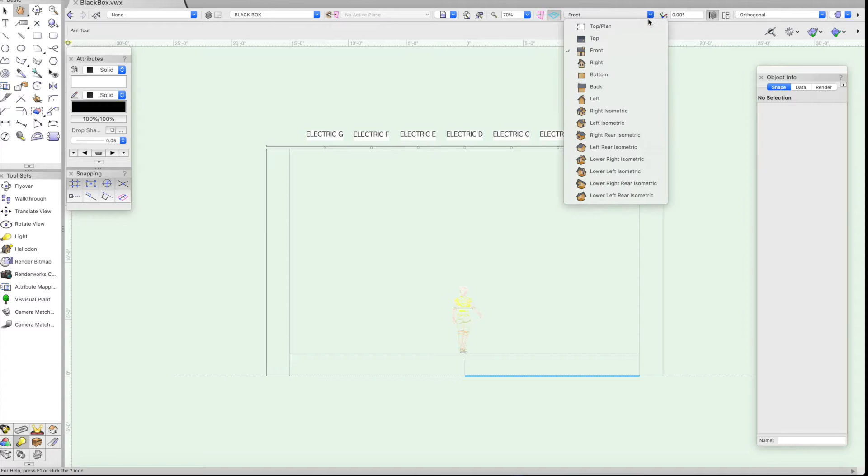This is the front view. We're going to switch to a section view so you can see what it is from the side. You can see here our audience is down front. And then I also wanted to show you, go back to the top view, we're working in Vectorworks, so I built this in 3D, which means that we can look at it using OpenGL, and you can see it more

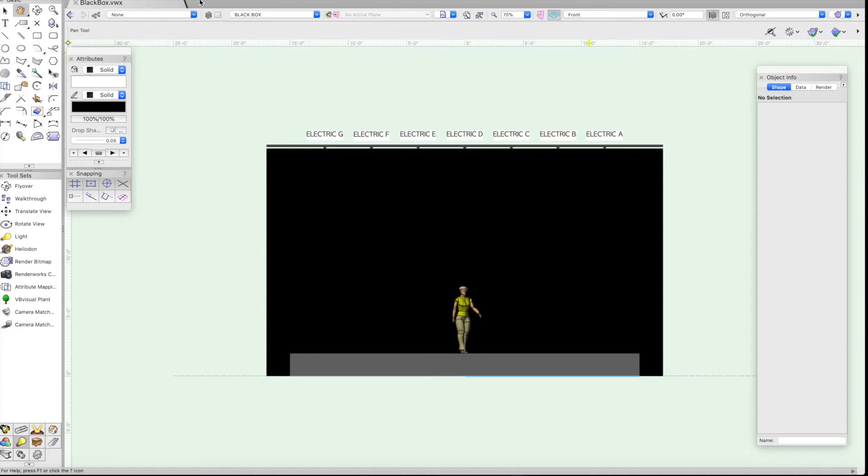as a 3D space. We will be turning the lights on, so I'm going to rotate the view here a little bit just so you can sort of get a perspective of what we're looking at. In this case, it's a proscenium style theater with the audience in front. The actor is dead center. And we're going to use this to explore the McCandless technique.

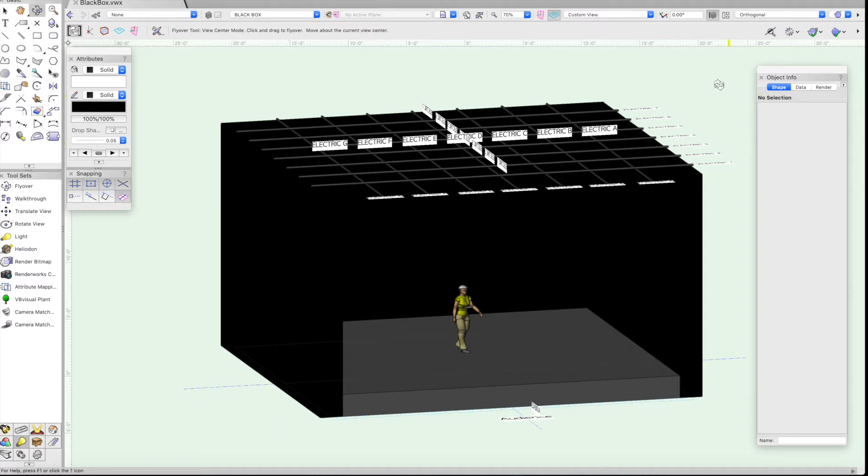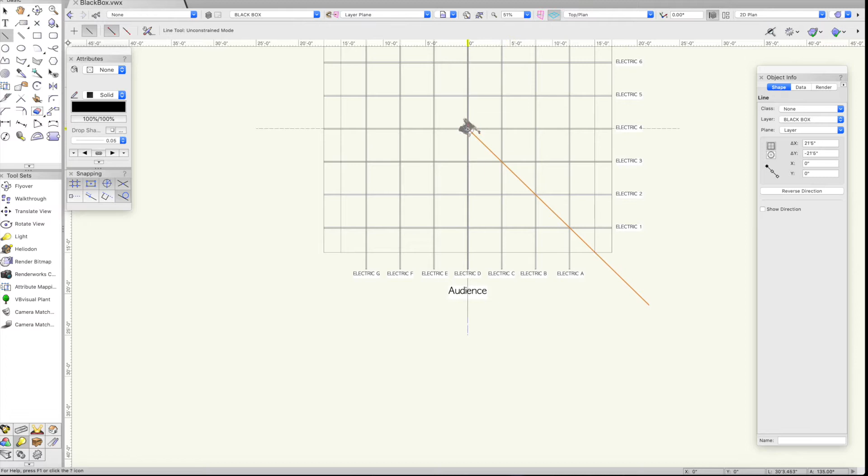So we've switched back to our top or plan view, and now I'm going to give myself some lines to work with so that I can measure 45 degrees. So if I'm looking from the actor's perspective, from straight in front of them, I'm going to go 45 degrees out to the right and 45 degrees out to the left.

And then again, because we're using Vectorworks, I have some extra tools to show you. This is in fact a 45 degree angle, and that's from the center of the actor out to the right and 45 from the center of the actor out to the left.

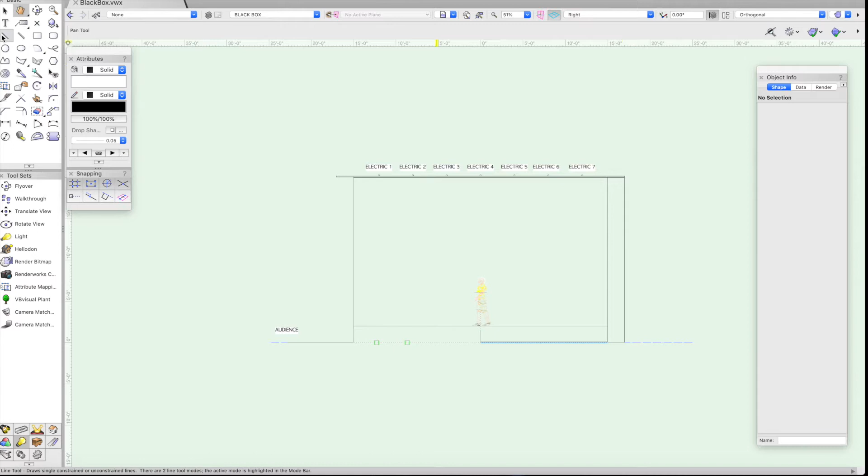Now we're going to switch to our section view, so I'm looking at this from the right side again. You can see our audience is down front, and I need to do 45 degrees up. So I'm going to draw a line straight out from the actor and then one 45 degrees up. And you'll see, I'm going to show you it's 45 degrees.

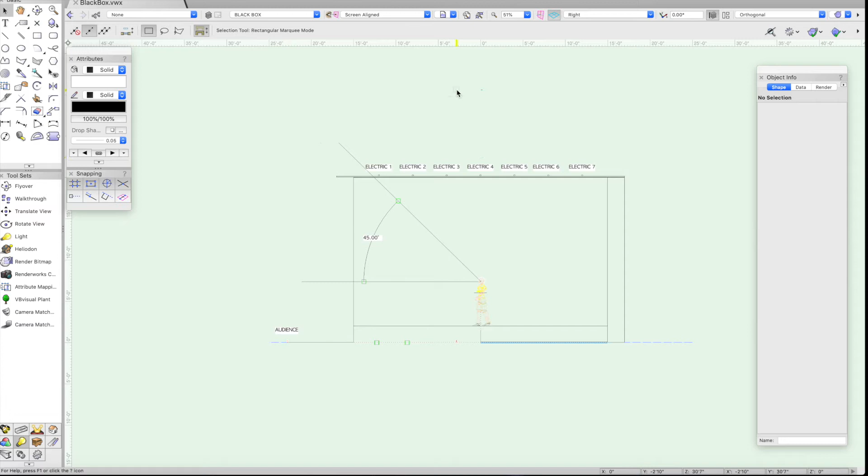And you'll notice here that electric 1 is not actually 45 degrees, but it's pretty darn close. So we know that we want to put our lights on electric 1 when we switch back to our plan view. So I'm going to grab a light here. I still have my 45s, and I know from my section view that I want to put it on electric 1, so I'm going to add a light.

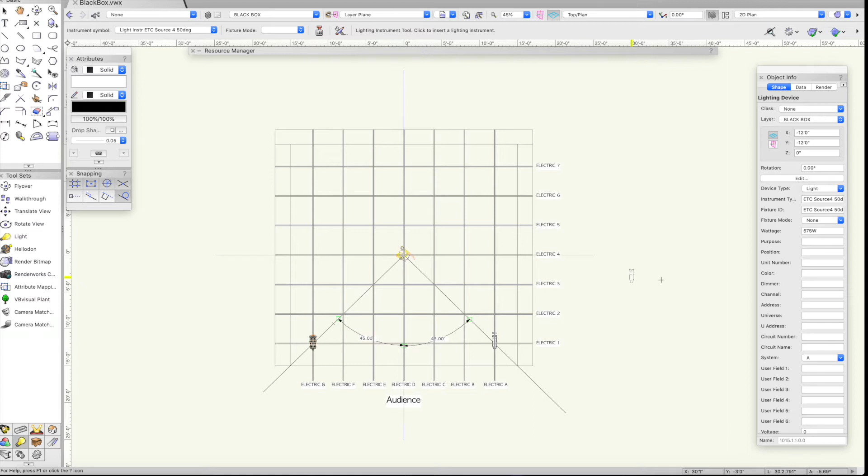In McCandless, we want to use one side warm and one side cool. So on one side, I've put in Rosco 02, which is Bastard Amber, and on the other, for my cool, I've put in Rosco 60, which is No Color Blue. These are both tints, so they have a high transmission rate. Now I'm switching to the section view, so that you can actually see where my light is, and that's the front view, where you can see where those two lights are in a 3D fashion.

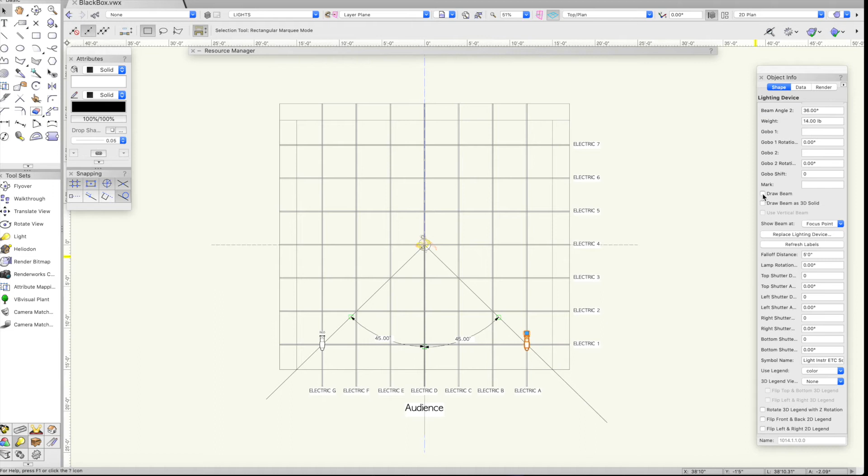Now I'm turning on the beams. So one of the things that Vectorworks does for us is you can actually draw beams so you can see how big that is. These are 36 degree units. And then you can also turn it on so that we can see both our field angle and our beam angle. So that was the 02.

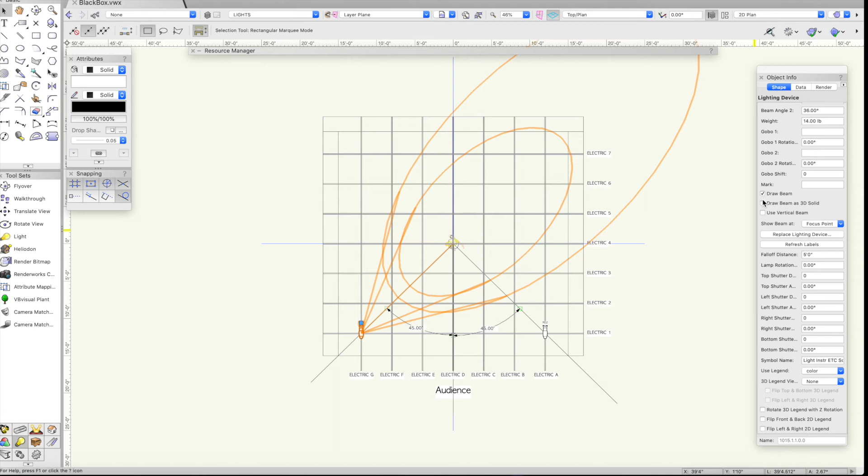Now I'm going to turn on my second unit, which is R60, so you can see what the full beam looks like and my beam and field angle. And then I'll turn both of them on so that you can see the overlap. Right, so the actor is very well covered. It's a decent sized acting area.

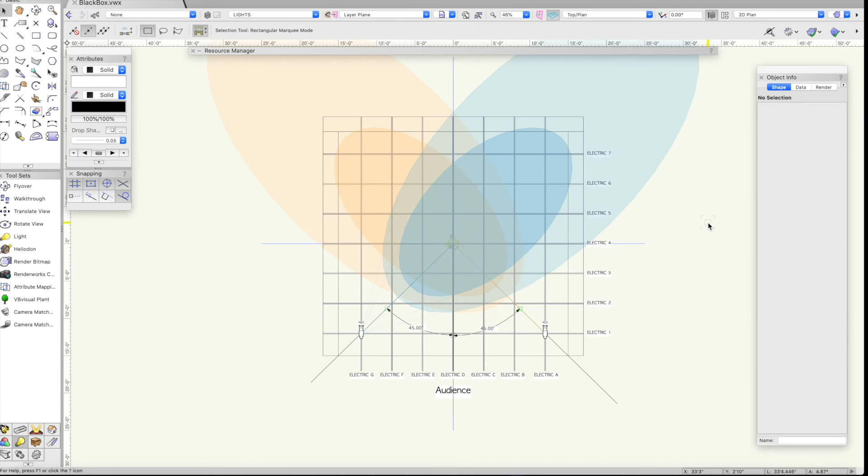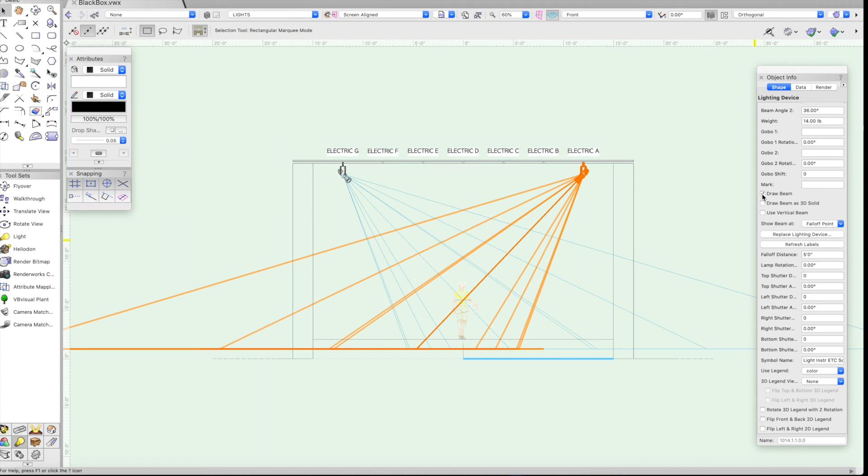Now we've switched to the section view again, so you can see what kind of coverage there is. So that's what we have in section view. And from the front, if I turn both of them on, there you go, you can see the coverage there. Well over 6 feet high, which is wonderful. We want to make sure that we have the ability to, as we're looking at acting areas,